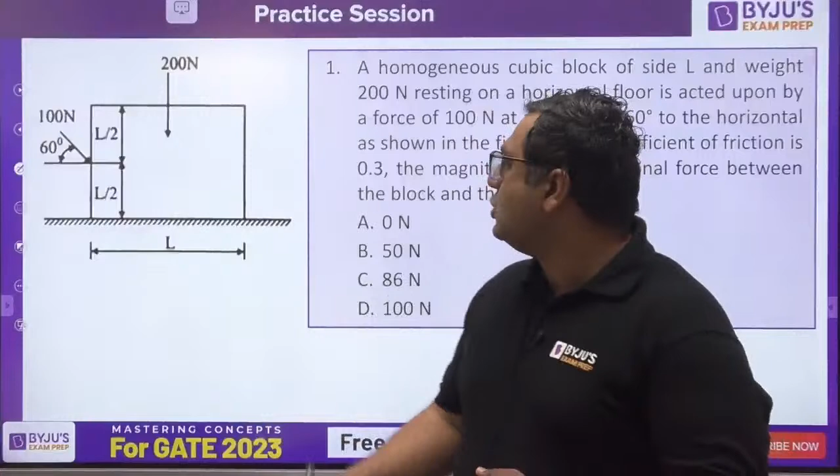So guys, we are starting the session, and this is the very first question from engineering mechanics. This question is definitely suitable for BARC and HAL both.

A homogeneous cubic block of side L, and weight is 200 Newton, so weight is acting as 200 Newton. Now he is asking that a force of 100 Newton is applied at an angle of 60 degree, so 100 Newton is acting here. It would be having two components. One component would be like this, 100 cos 60. And obviously you would be having another component downward only, that is 100 sin 60.

Now you need to see that if the coefficient of friction is 0.3. As you are applying the force in this direction, the tendency is to move in this direction. So here the friction would be coming, that is mu times n, and the normal reaction would be n. Now he is saying find the magnitude of friction force between the block and the floor. So you just need to find out the friction force magnitude. For that you need to calculate the n, and for that you need to apply summation of vertical forces equals 0.

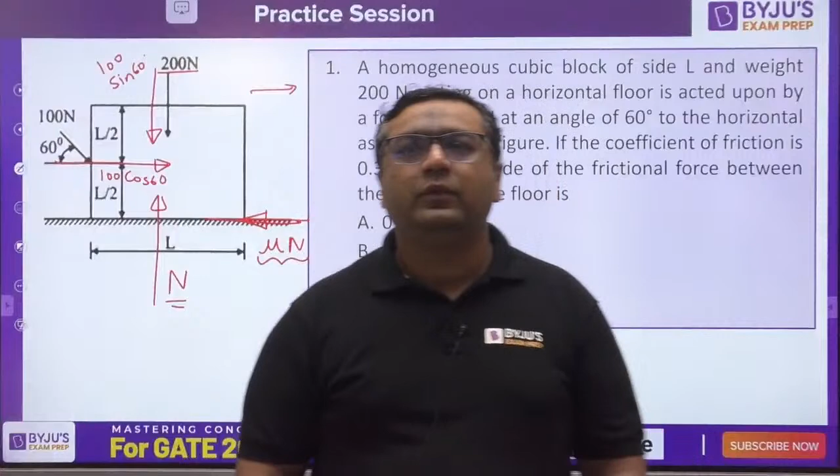Great, Abhishek. This is a very easy question from mechanics, from friction basically. This is a favorite topic for all examinations in engineering mechanics. If it is in syllabus, a question would surely be coming from friction. Abhishek is saying 50 Newton, very good. Let us see what about others. So Abhishek has given the answer as 50 Newton.

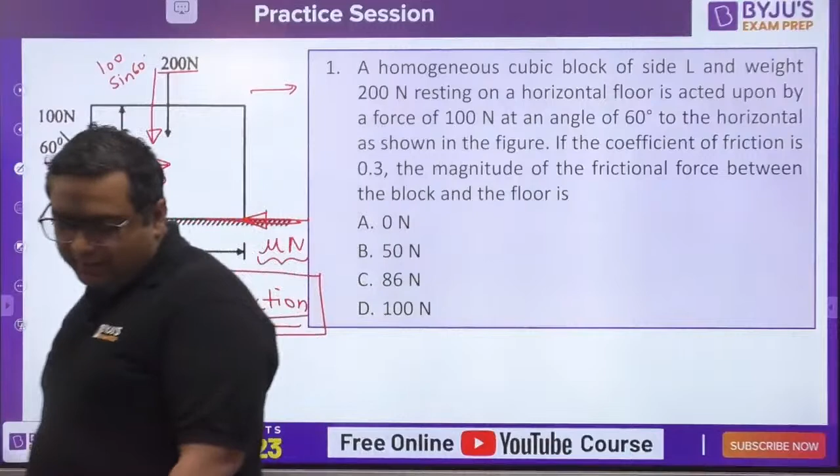What about others? Anybody? I would be giving you a hint for that. You need to do summation vertical equals 0 to find out the value of n. You can see 200 Newton acting downward, 100 sin 60 also acting downward, so minus 200 minus 100 sin 60, and then n is acting upward, so plus n equals 0. This will give you the value of n. Very good, Gaurav Vajpayee saying answer to be C.

Let us see who is correct out of you guys. So you would be getting n from this, and once you get n value, you can also apply summation horizontal equals to 0.

So if you are going to find this, first let us see what is mu n. When you write mu n, this is the maximum value of the static friction. So when you find it out, it would come out to be the same as what Gaurav Vajpayee is saying, that would be 86 Newton.

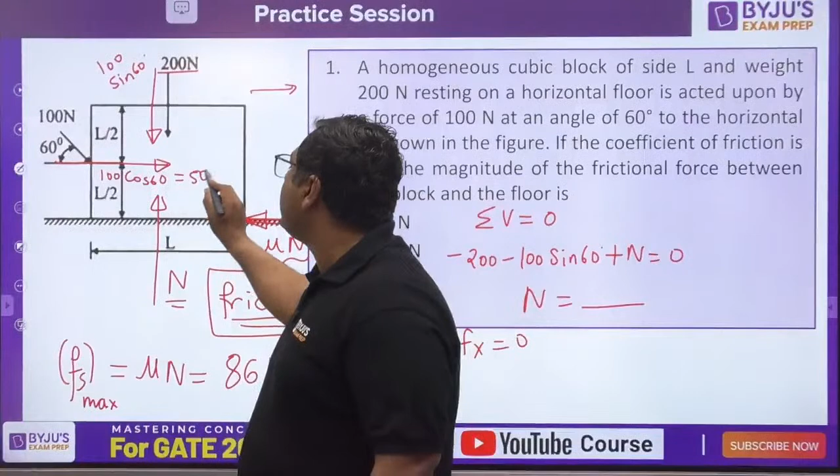But there is a twist. That twist is that this is the maximum value of friction which can come. But if you see the horizontal force is 100 cos 60, this is 50 Newton. So if we have an applied force of 50 Newton, friction cannot be more than that, because friction works to stop the relative motion. So if it were more than 50, it would cause the relative motion.

So this is the maximum value which can come. The answer would be 50 Newton, because when you apply summation fx equals 0, since the body is at rest, this cannot be more than 50 Newton. So the answer is 50 Newton, answer B. Abhishek, you have given the right answer.

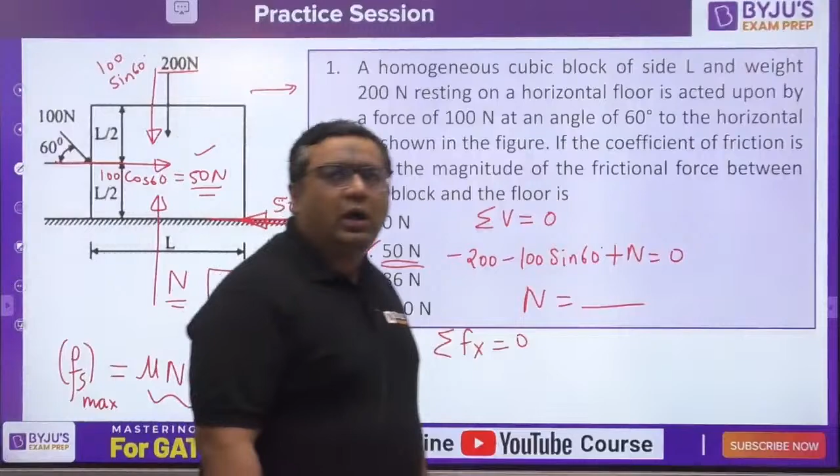So I feel Gaurav, you got your mistake for sure, yes or no? I also wanted to know, like last session also you attended, I asked you about the exam also. Okay, I will connect with you after the class.

Let us see the second question. This is from the trusses. After friction, the second important topic is truss. Here you need to find the force in member AC. I would recommend you go by method of section. If you cut the section from here, going by method of section will give you the answer fast. Method of joint will take a lot of time.

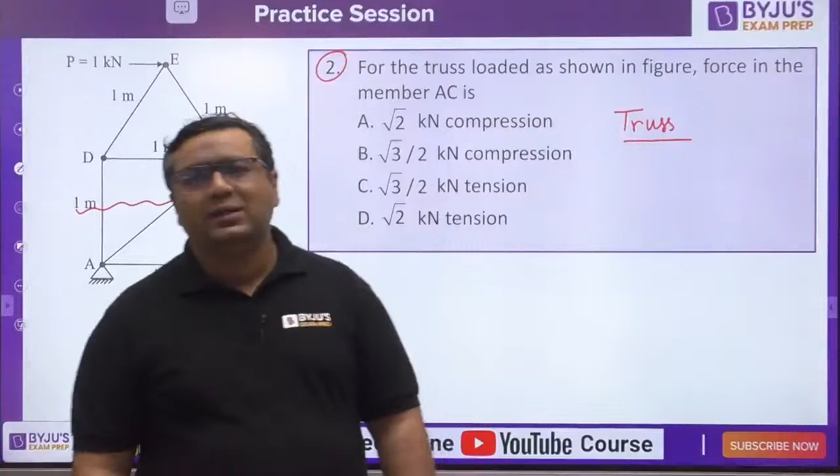Try to solve this question guys, and quickly like and share the session so other students can join. Some people, like Abhishek Prasad, your answer is correct for the previous question. Some students feel it is a less important subject for the exam. Guys, it is not like that. PSUs, when they increase or decrease the weightage of some subject, nobody knows. The same is for BARC, ISRO also.

So there is no standard format that one subject comes more or less. Abhishek is saying the answer is A, meaning root 2 kilonewton compression. Let us see, so he deleted it, meaning he is still thinking tension or compression, or root 2 or root 3 by 2. Yes, Gaurav is saying A.

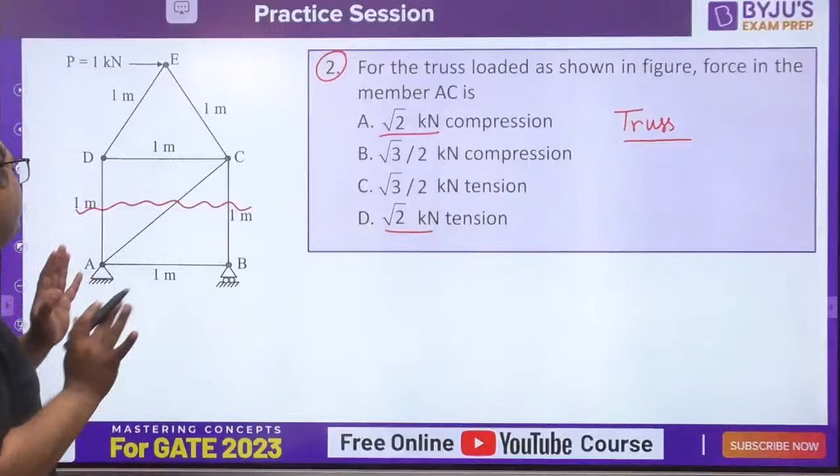What about others? Abhishek Prasad is saying D now. Okay, very good. So both of you have answered root 2 kilonewton only, magnitude wise, but direction wise there is some issue I feel. Let us see. First you must be clear that now we have made this section, so we would be having force in AD member, AC member and BC member.

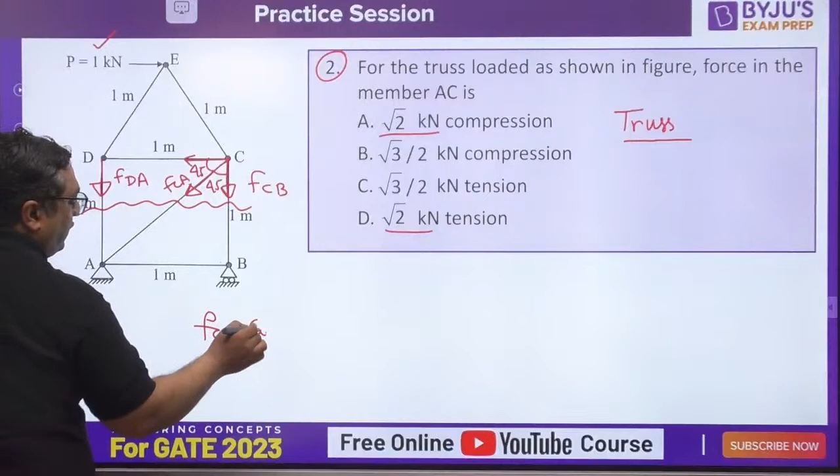So this 1 kilonewton is acting, so we have this force in vertical direction, this force also in vertical direction. So this is FCB, this is FDA. To balance this force, we want force in this direction, so this force would be acting in this direction. So FCA would be in this direction, so that this component of FCA, as the sides are 1 meter, this angle is 45, and so is this. So FCA cos 45 would be balancing this 1 kilonewton.

Okay guys, so Omkar is saying D. So you would find FCA. FCA is 1 divided by cos 45. The answer is no doubt root 2 kilonewton, and direction also we have taken correct only.

So when you are confused in direction, just imagine a spring. Force is coming away from the joint. So when the force is coming away from the joint, when you are in tension, then only you would be applying like this. So the answer would be D. Gaurav, what are you doing, silly mistakes. So answer would be D, in tension.

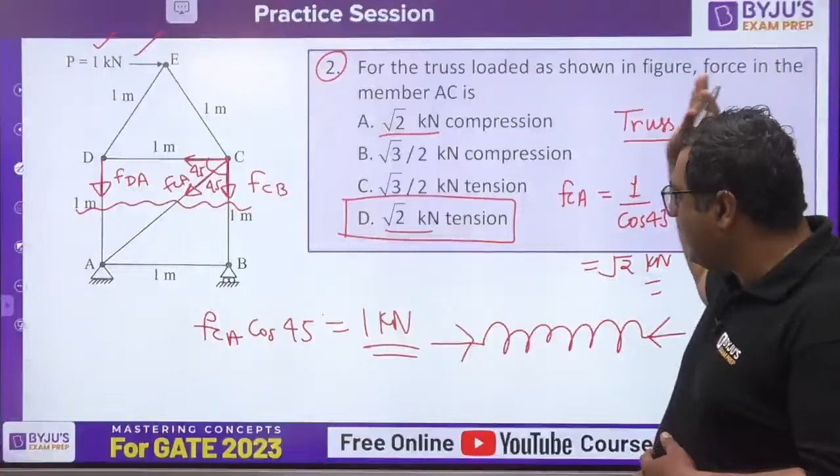I feel I have covered that kind of things on YouTube also in great detail last year. Okay, let us see the next question.

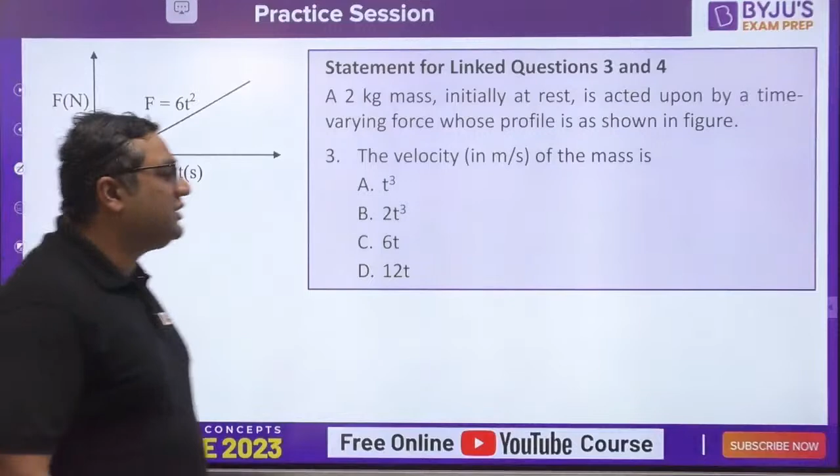This question is from kinematics, the third important topic. It is having two parts. Mass is given as 2 kg.

We know that a variable force is acting, given as 6t square. Force is mass into acceleration, so from that you can find out the acceleration. If mass is 2 kg, acceleration is 3t square.

But you need to answer about the velocity. You know acceleration is nothing but dv by dt. I feel now you can very easily do this. This type of question comes in GATE, BARC, and all the examinations. Solve it.

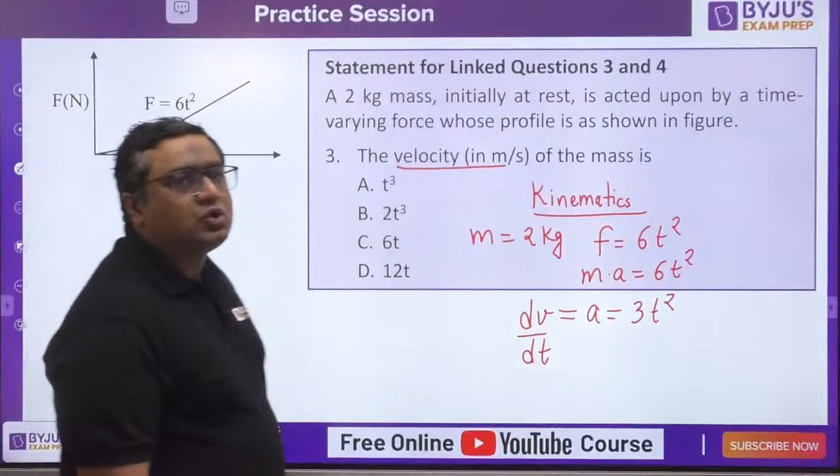Omkar is saying answer to be A. What about others? So when we are getting dv by dt equals 3t square, dv is 3t square dt.

So you would be getting v minus u as t cube. You can see at t equals 0, the force is 0, acceleration is also 0, and initially at rest is mentioned. So it is sure that u is going to be 0. So v is t cube. A is correct.

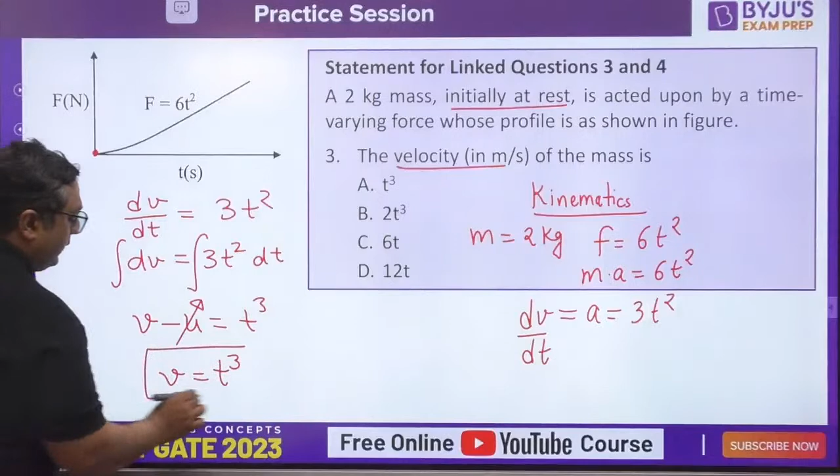Omkar, don't worry, I have taken all the levels. I feel you have attended last class, where we had a very good level question in machine design, 3 to 4 questions, and none of you were able to do that. So dear, I have mixed it up because this session is for both BARC and HAL, so I need to cover both the levels. That is the reason. So this is the second part. If you see the HAL pattern, you will get this type of question. So mind it, I need to take care of both the papers. That's why some questions are very easy, some are difficult, some are average.

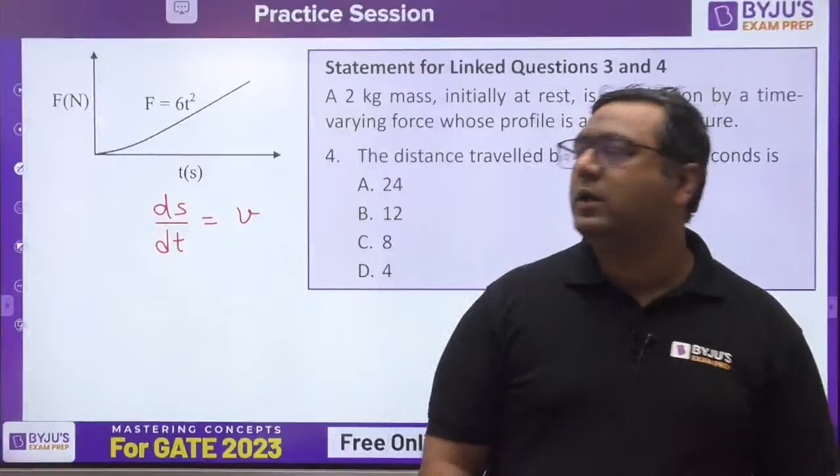So this is basically to find out the distance traveled. You know ds by dt is velocity. From here, don't worry, other questions you will feel something of better level for sure. Here you need to find out displacement after 2 seconds, so s at t equals 2 seconds.

Yes, like in production also we had very good level of question you have seen. Very good guys. So this is basically of HAL type, okay, this is of HAL type.

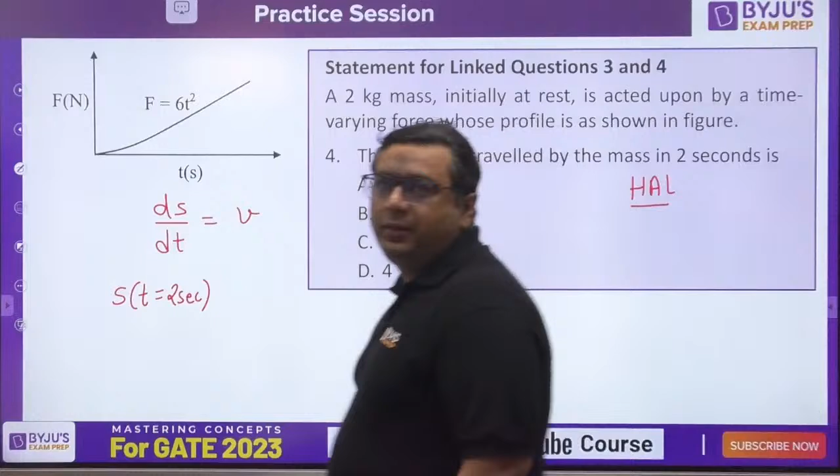Yes guys. Omkar is saying D. So my dear, ds by dt, velocity is t cube. So we got s as t to the power 4 by 4. So when you would be integrating it, after integration only we are getting it.

So we got it. Put t equals 2. You will get 4 would be the answer.

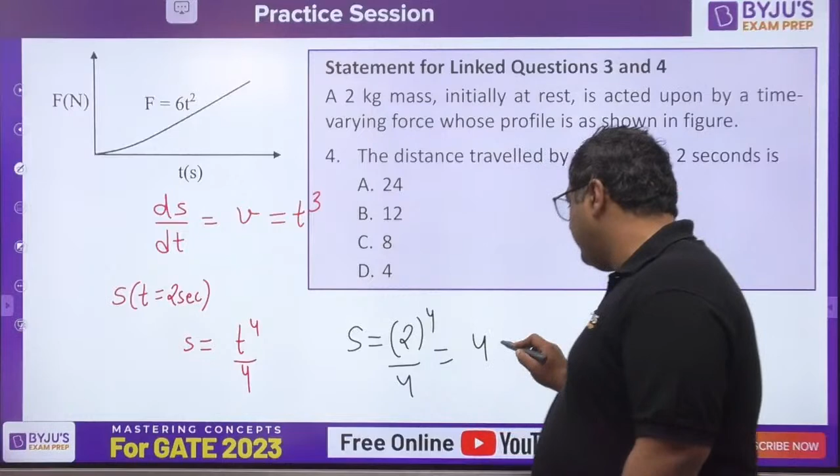Let us solve the next question, guys. This is certainly a good question this year, GATE 2022. Very good, Gaurav, in GATE 2022 similar type of question was asked. So this is a good one. I will say that this is not a difficult one, but it is a good type, because sometimes by looking at such figures, people just leave the question.

So it is okay for both the exams, BARC and HAL. As this is an exam specific series, we need to take care of level of both the exams. Otherwise, don't worry, if you remember I came for some series like Super 20, Super 30, those series are having some wonderful level of questions. So this year also we would be coming with such series. And for Vision 2023, for 2023 students, I would be soon coming for Mastering Concept. There also I would be going for Engineering Mechanics and Strength of Materials. We will start it in the end of this month.

So what would be the answer for this, guys? Yes, I would be giving you a hint. If you will see the FBD of this rod, the things would become easier for you.

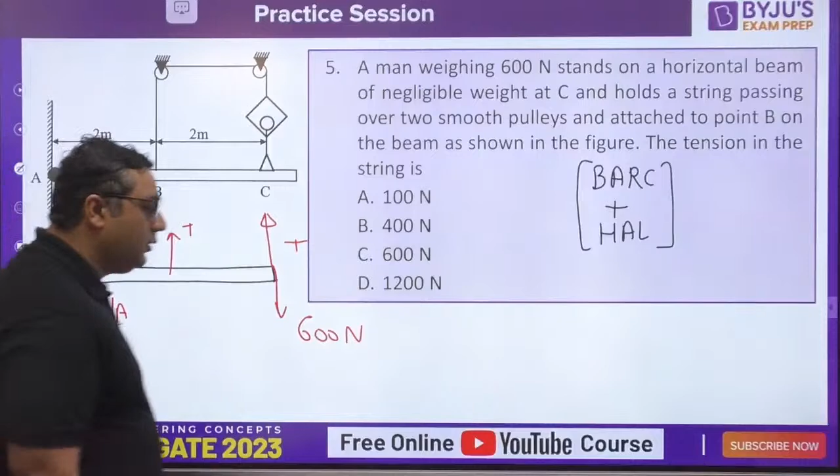FBD is in front of you. Abhishek is saying the answer to be B. What about others? If you guys are doing this after looking at the hint, it means it was a good question for you.

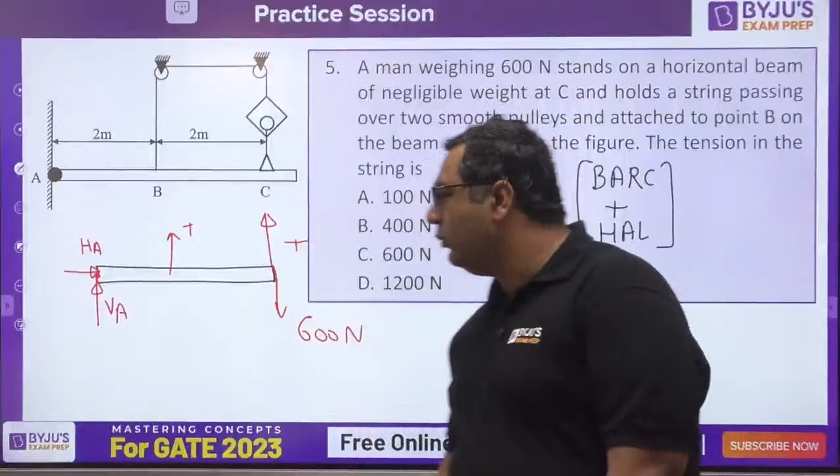This is tension T. So you just need to take summation of moment at A equals 0, because both these forces would be passing from the same point. So this T anti-clockwise acting at 2, minus T into 2. This T is acting at 4, minus T into 4. This 600 is acting at 4.

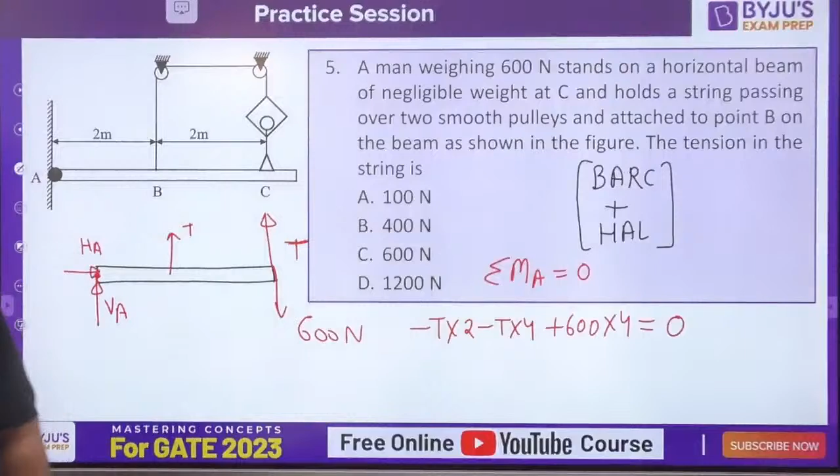Gaurav is getting B, Abhishek is getting B. What about you, Omkar? Omkar, Abhishek Sahu. Yes, the answer would be coming out to be... this is 4 plus 2, 6T, 2400. So T would be 400 Newton. B is correct.

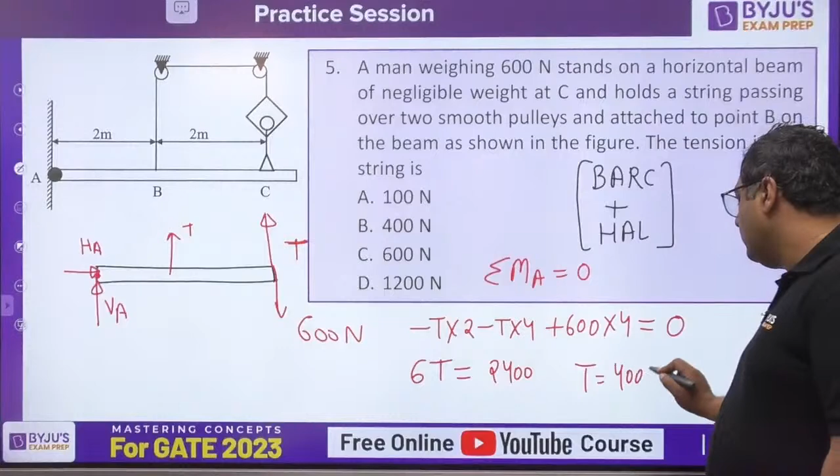Very good guys, let us move to the next question. This is the last question from mechanics. Then we are coming with other questions from MD only - brakes, bearings, fatigue loading. Many questions are there.

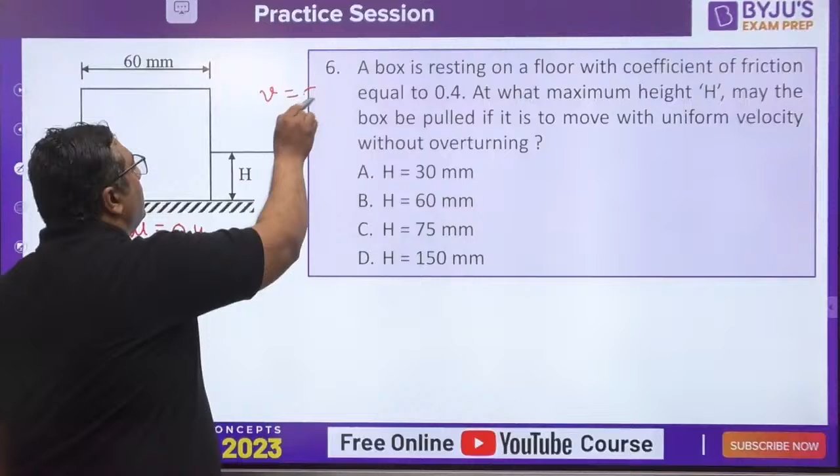Let us see. A box is resting on a floor with coefficient of friction equal to 0.4. So for this, mu is given as 0.4. What maximum height h may the box be pulled if it is to move with uniform velocity without overturning? The last point without overturning is when the normal reaction is passing through this point, because after that the turning happens. So we would assume for the limiting value, N would be acting here, mu N would be acting here, and weight would be acting here.

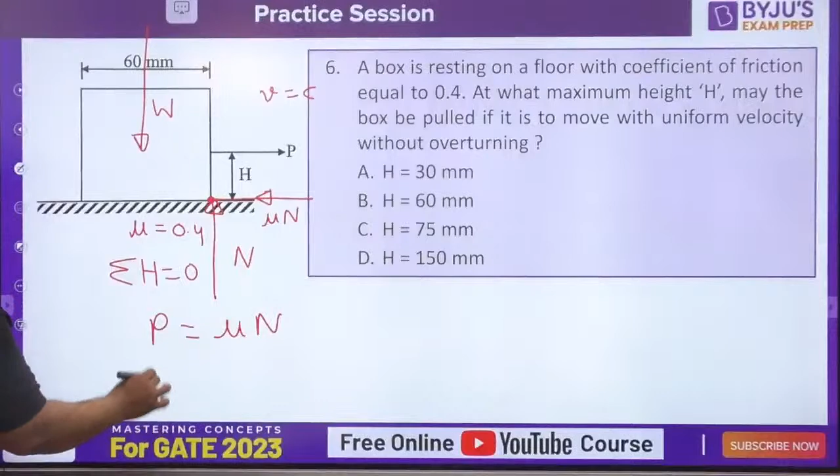You need to find out now what is the value of h. If you apply summation horizontal equals 0, you would come to know that P and mu N are equal, and W and N are equal. Solve it. You need to apply P into H, the moment created by this would be equal to the moment created by W into 30. This will give you the value of H.

Coefficient of friction mu is given to us. W into 30, P is mu N, and N is W. So I feel it is already almost done.

Shivani, good evening, how is your preparation going on? I was expecting that you are performing well in GATE. What was that, how many marks are you getting in GATE? Abhishek, if you don't want to tell in the comment section, you can also tell me on WhatsApp or Telegram.

Abhishek is getting a C.

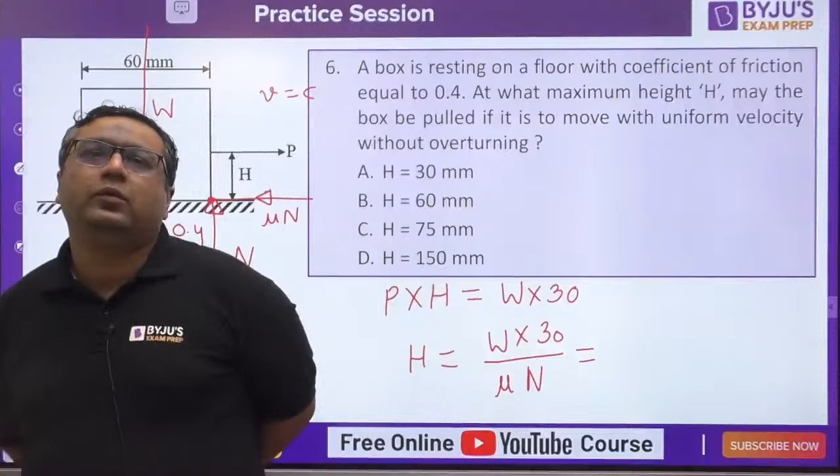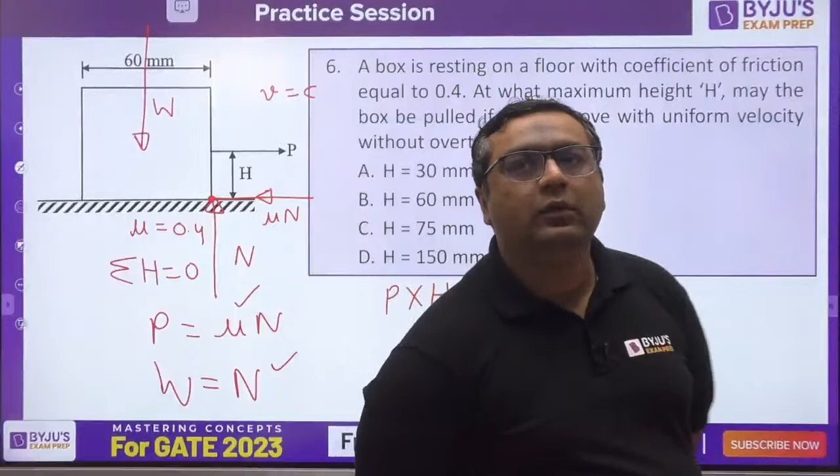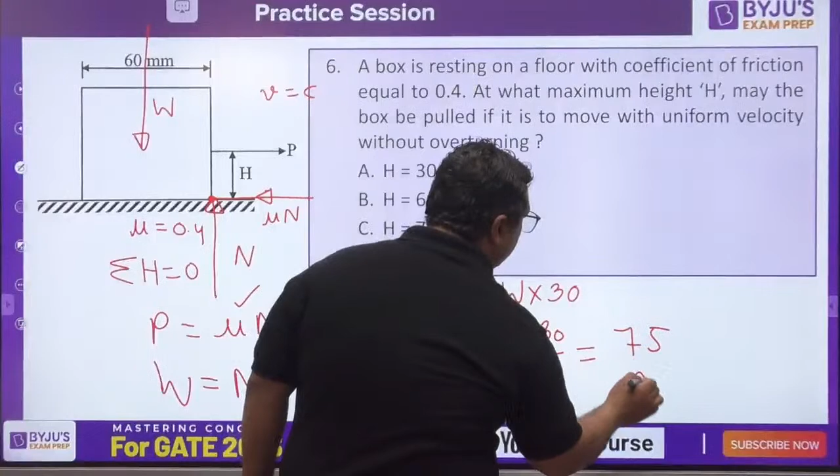So Abhishek has answered it as C. What about others? Shivani is also saying C. What about others? Gaurav has already answered it as C only. So yes, the answer is C. C is correct. Let us see the next question.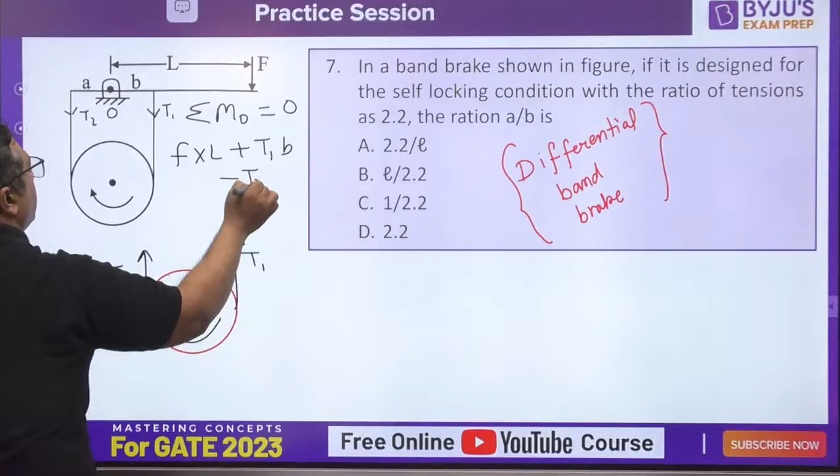So if you see this drum, it is rotating like this. Here there would be a tension T1, here there would be a tension T2. If you are talking about this point O, summation about O would be 0, so F into L clockwise. Here also tension would be T1, T2. T1 is clockwise. And braking torque is T1 minus T2 into R.

So you would be getting from here, F should be T2A minus... F and T1 are in same direction. F is T2A minus T1A, T1B. So F should be less than or equal to 0 because the condition is mentioned as self-locking. So you can answer the condition - what would be the answer? This is differential band brake, guys.

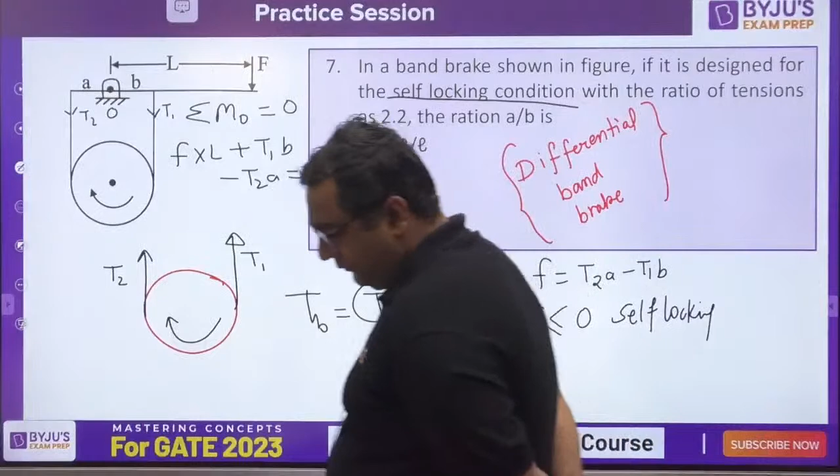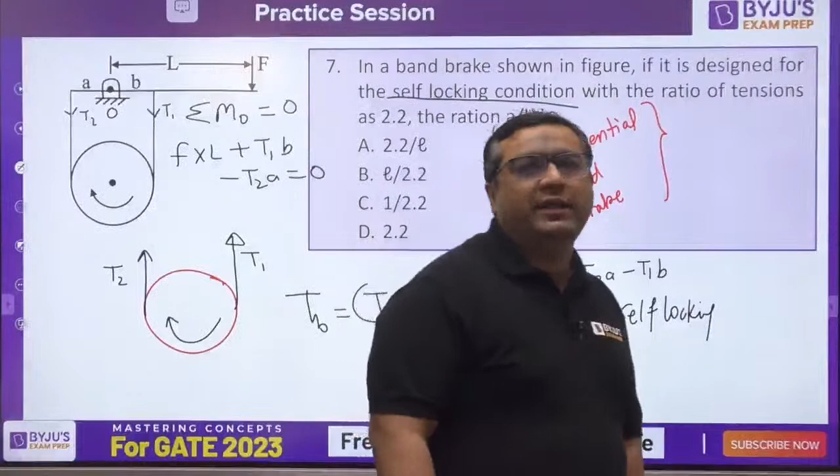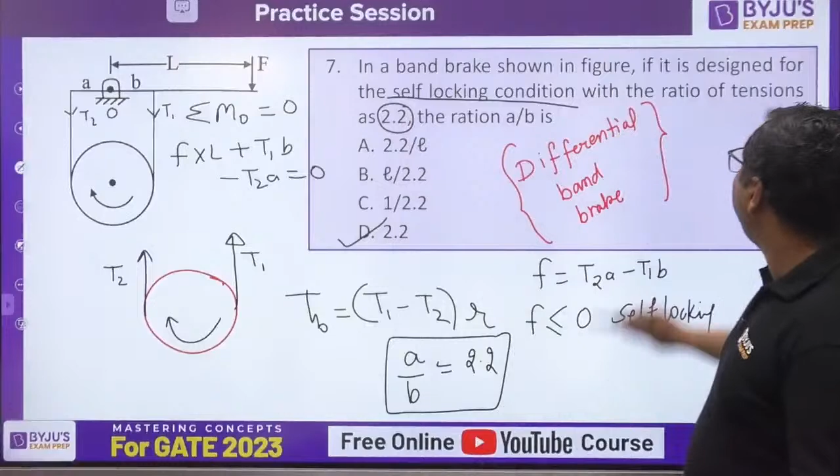Gaurav, Abhishek, Shivani - very good, Shivani is saying D. Gaurav is also saying D. Yes, so dear you would be getting A by B, 2.2. Why? Because it is mentioned the ratio - the ratio of T1 to T2 is 2.2. Same you would be getting here.

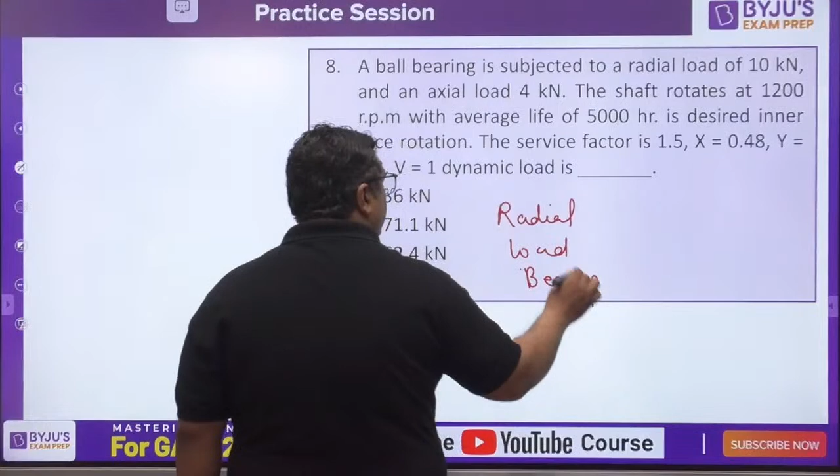Let us move to question number 8 now. This is from radial load bearing. First of all, you need to find out the equivalent load, X V FR plus Y FA into S, then C by PE, L90. Values are given to you. Question number 8 it is.

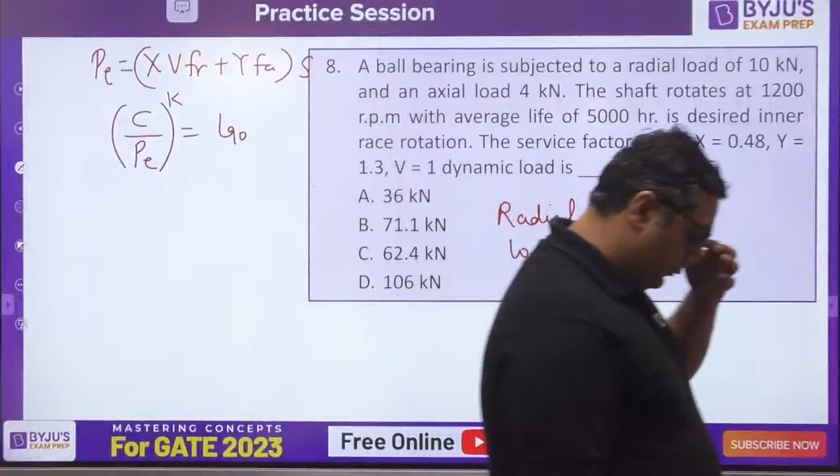Yes, yes. Yes, guys.

So here you need to find out the dynamic load. Actually, radial and axial loads are given, you need to find out dynamic load carrying capacity. C is unknown here. So Abhishek is getting D. Gaurav is saying B, Shivani is also saying B. So dear, the answer would be D here, 106 kilonewton.

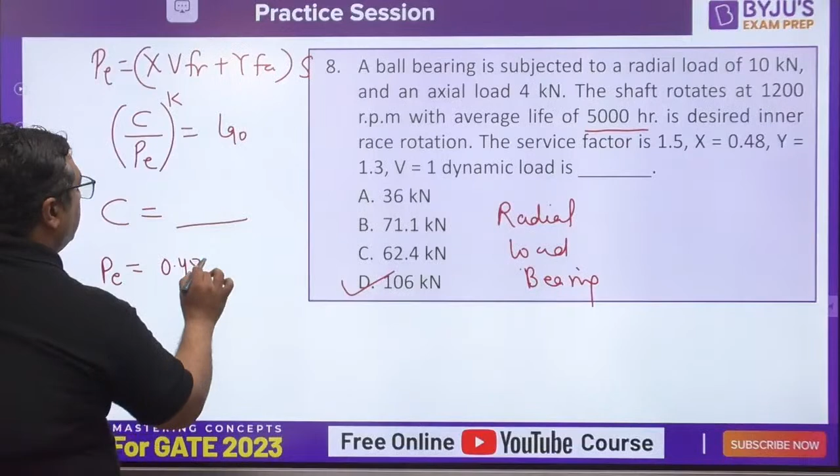When you would be finding out the PE value, you need to apply that. You must have seen that the life was given in hours - it needs to be converted into million revolutions. So you would be applying PE first of all. X value is 0.48, V value is given as 1, into FR, FR is 10 kilonewton. Okay, then plus Y is 1.3 into axial load of 4 kilonewton into service factor of 1.5.

You must have missed something - this will give you PE. And L90 you need to find out in million revolutions: 5000 is the hours, into 60 will convert into minutes, into speed as 1200, divided by 10 to the power 6. This will give you the L90 value. So the answer would be D. Did you get the mistake, Gaurav, Shivani, where you have made it? Maybe you have not taken the service factor, or this conversion you may not have done. Is it clear? So answer would be D for this.

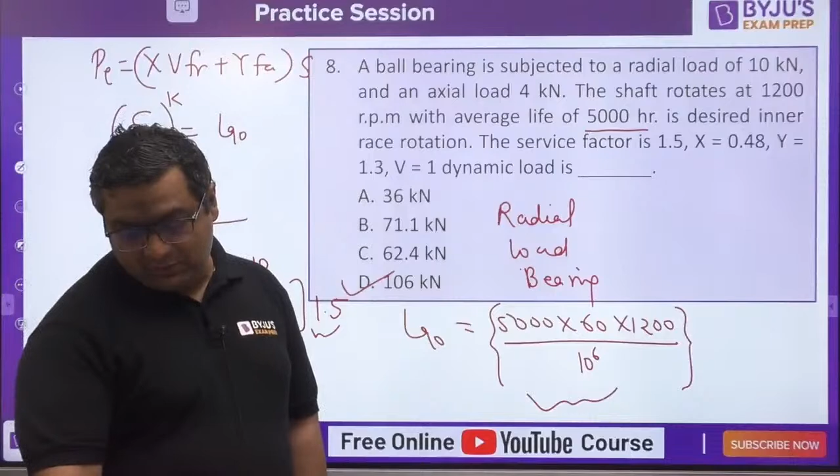So this was question number 8. Let us move to the next question. Next question is from the riveted joint now once again. Previously we have seen a question without calculation. Now we will see a question with calculation - riveted joints.

This is the problem on riveted joints. Yes, I understand that.

So guys, this is the data given. You need to find out the resultant maximum shear load. You already know the procedure. You need to first of all find out the CG or centroid, which is this.

Eccentricity is given to you. Now you need to see the effect. You can see, there would be one load coming and one couple coming. So when you would be having this condition, the primary forces would be coming like this. Secondary forces would be coming like this.

So FP1, FS1, FP2, FS2, FP3, FS3, FP4, FS4. You need to find out the resultant maximum shear load. So just solve it and get the values.

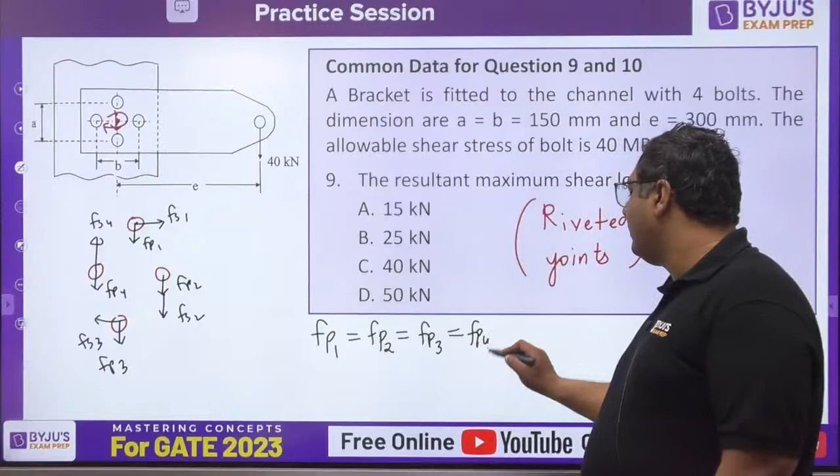So first of all, primary is very easy to calculate. FP1 equals 10 kilonewton.

Then you would be finding out the secondary. FS1 R1 plus FS2 R2 plus... P into E. This will give you FS1, FS2, FS3 and FS4.

This also I feel you would be getting 40 kilonewton. So you would be finding out resultant as FP square plus FS square plus 2 FP FS cos theta.

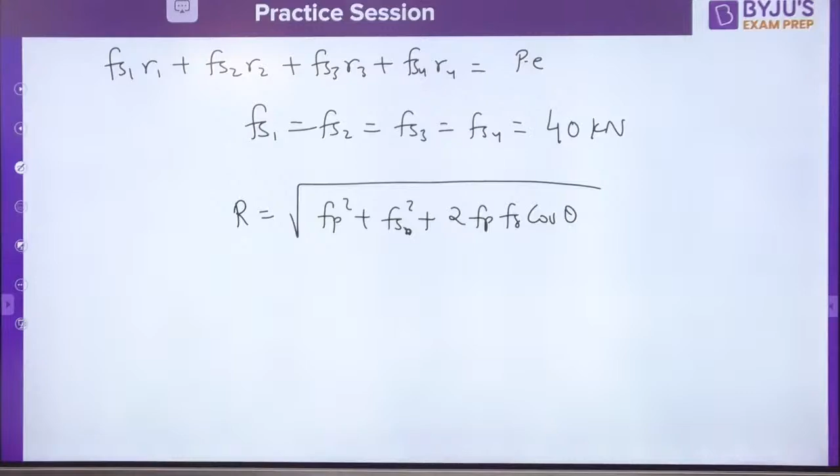Very good. So the answer everybody is getting is D, and which is correct answer. D is correct.

So here you need to find out the nominal diameter of the bolt. Once you get the resultant force, use pi by 4 dr square equals tau max.

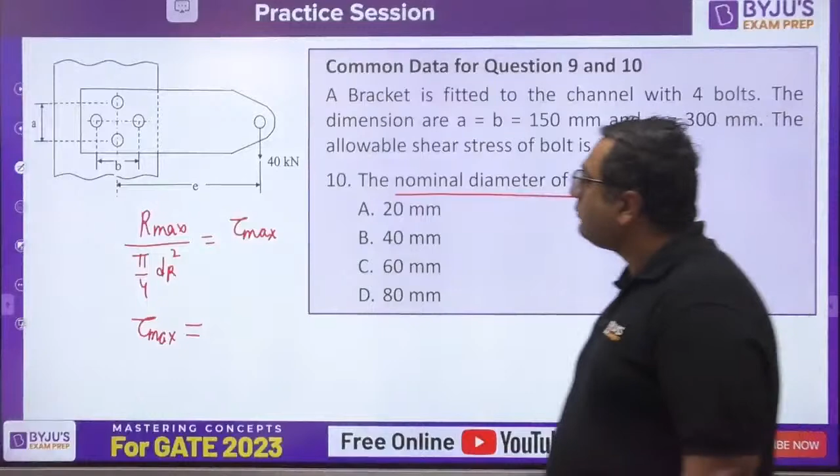Yes guys, question number 10 it is. Okay, Gaurav is getting B for that.

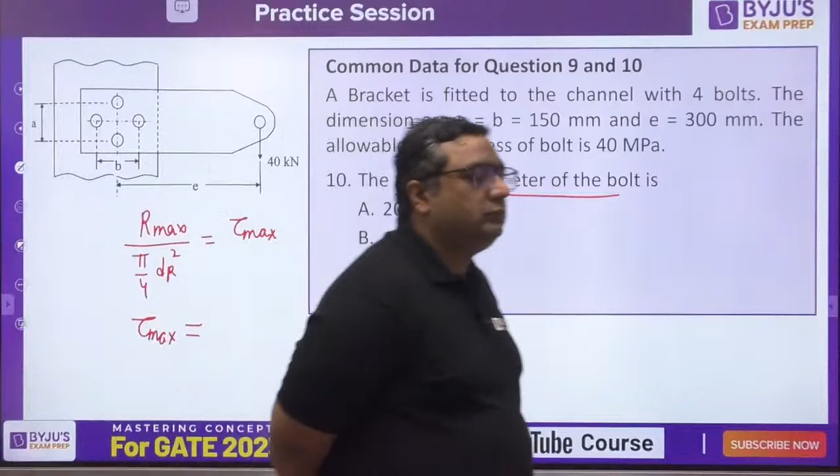Shivani is saying B. Gaurav is also saying B, and B is correct. So you would be getting dr as 40 mm. Because tau permissible was given, so you would be saying it's less than or equals to tau permissible.

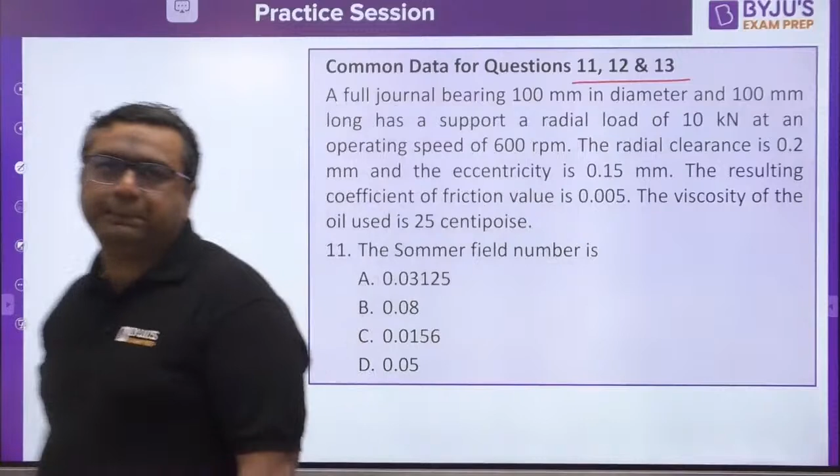Very good. So guys, now we reach the bearing part. Now three questions continuously on the bearings. First of all, you need to find out the Sommerfeld number. So Sommerfeld number is Zn by P, D by C. So for that you need to find out the P, which is W by LD.

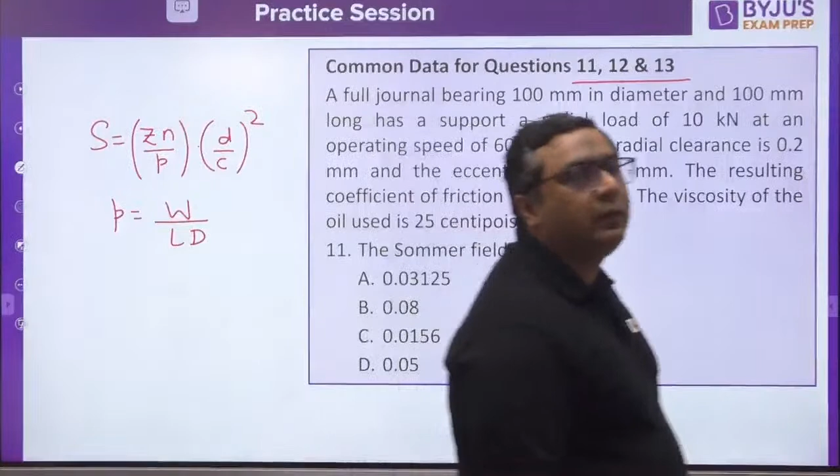Find out. Yes guys, find out the Sommerfeld number. Slightly calculations are involved for sure.

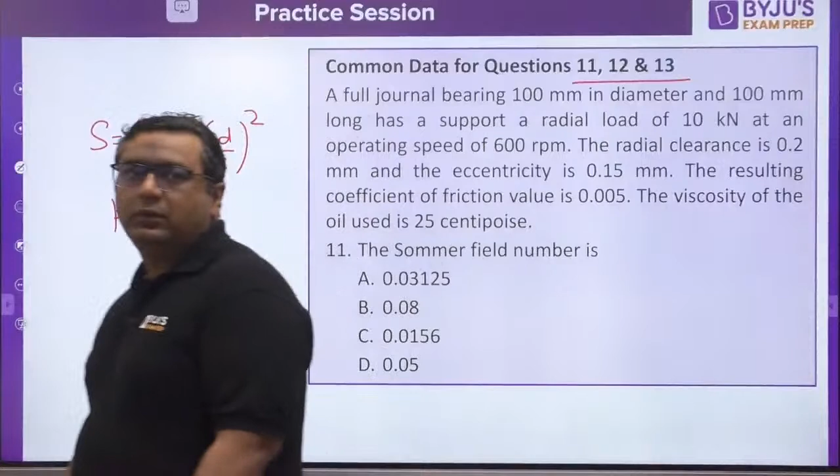Let us see how many of you give the right answer for this. Four options are there. Very good. Gaurav is saying C for that. This is a good question for BARC.

Yes. So guys, the answer is yes, C is correct. So Sommerfeld number would be coming out to be 0.0156. Very good, Shivani.

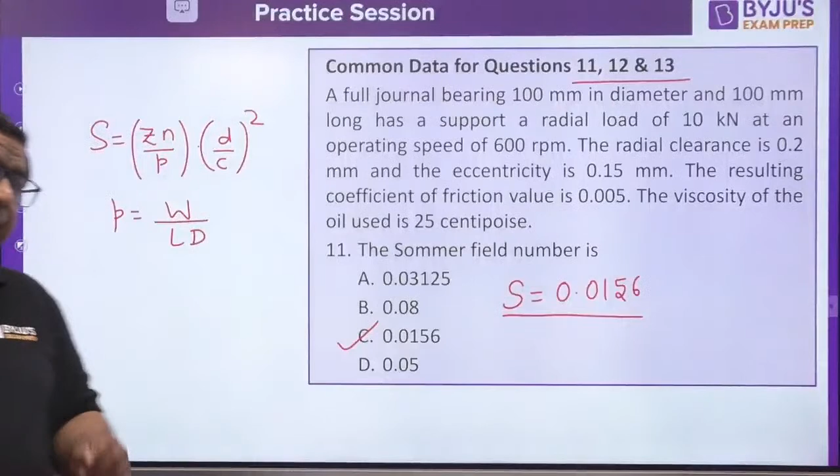So let us move to the next question. Here you need to find out the frictional power loss. You know that power loss is mu WV.

And mu is Zn by P, 2 pi square, D by C, by Petroff's equation. P you have calculated in the previous question.

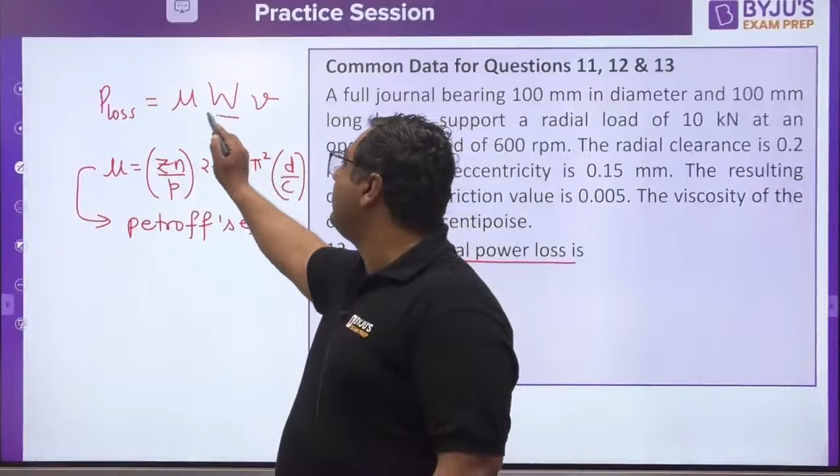So first you will find out mu, then you will apply here. W is given to you. Velocity you know is r omega actually.

I feel coefficient of friction is already given. Okay, sorry, coefficient of friction is already given, no need to find out this then. Mu is given, W is given, V is R omega. Okay, you can see the speed is given.

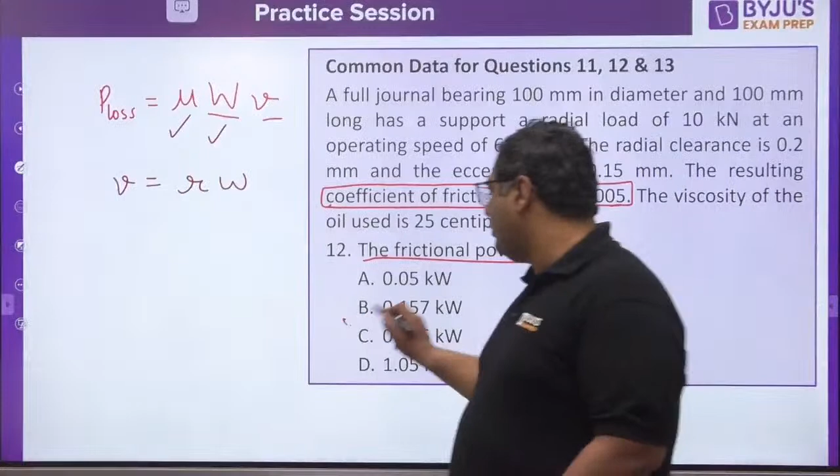Okay, Gaurav is saying B, Shivani is saying B. Yes, guys, your answer is correct. The answer would be coming out to be 0.157 kilowatts.

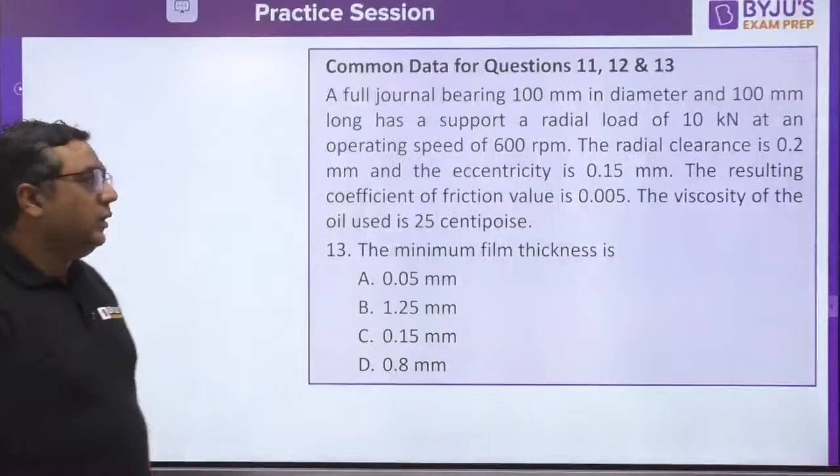How? If we have the case of hydrodynamic lubrication, this is the bearing, this is the journal. This is the center of journal, this is the center of bearing. So this distance is E, this distance is R, this is H naught.

Okay, so when you are going to apply, this total is capital R. So this capital R is H naught plus R plus E. So H naught plus E is equals to C1. Is it clear?

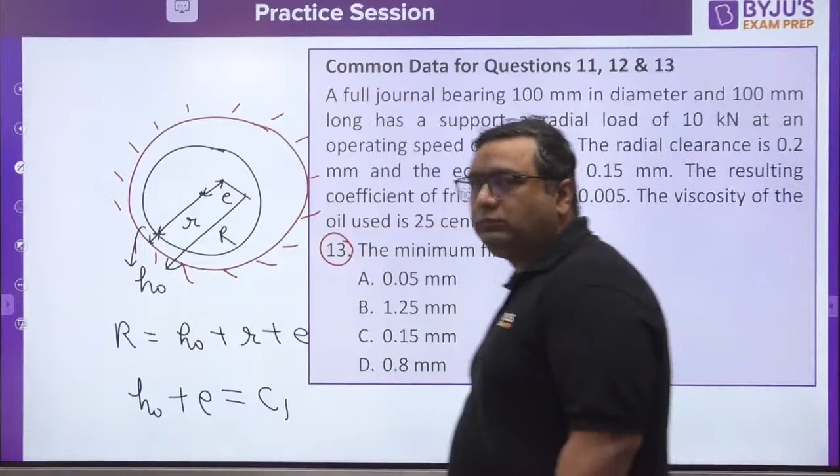So you need to find out and get the answer. Very good, Abhishek. So apply the formula and get the value. I have calculated for you. You need to find out the H naught value.

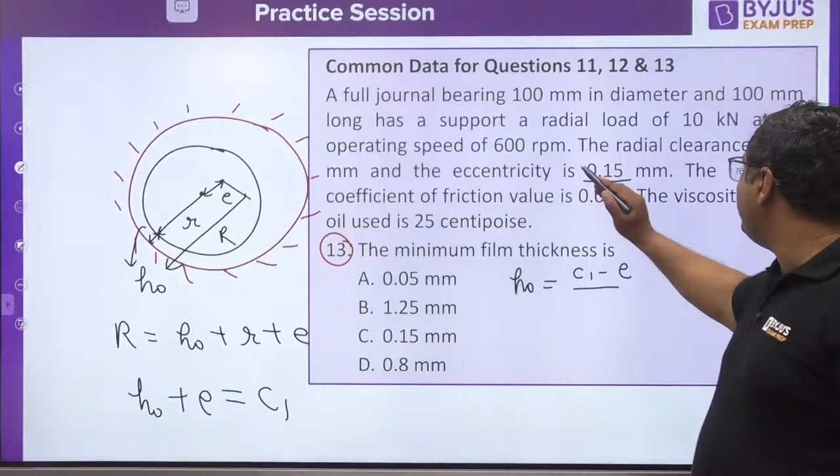Very good, Abhishek. So you can see H naught is C1 minus E. It is mentioned already. Eccentricity is mentioned, radial clearance is mentioned. A would be the right answer for this. Very good, Gaurav. Very good, Abhishek.

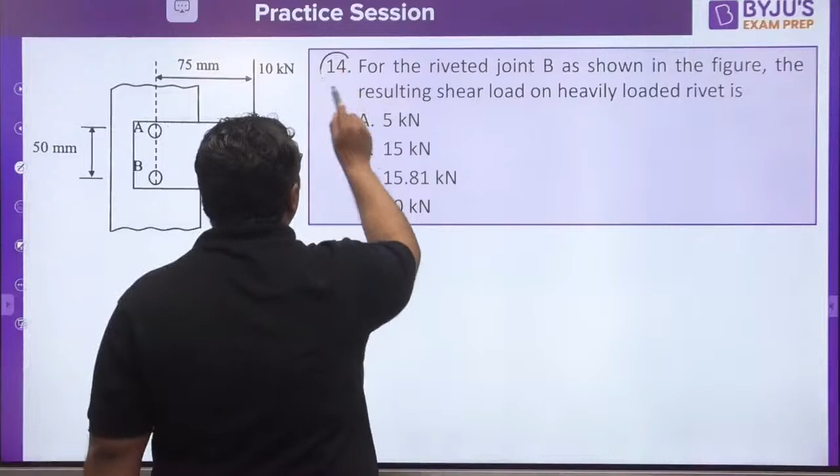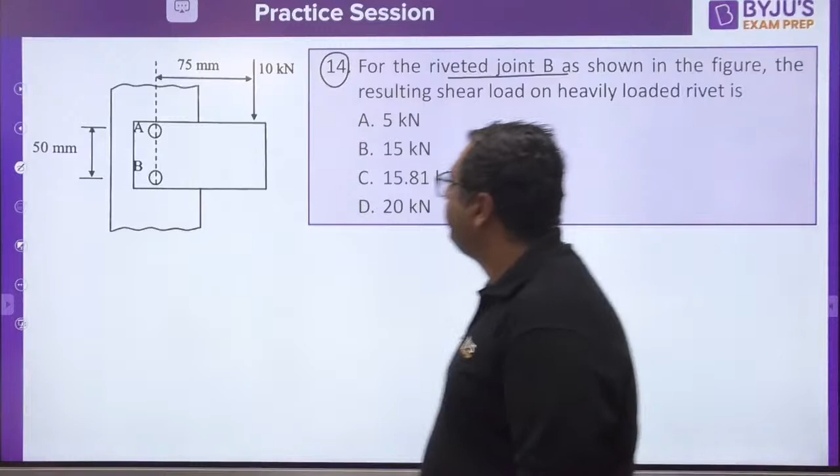Now question number 14, again from riveted joint, eccentric loading case. We have two more questions after this on Miner's rule and Soderberg. So you need to find out for riveted joint B the resultant shear load. You know, for this 10 kilonewton primary force in A, primary force in B is 5 kilonewton.

Yes, what about after this?

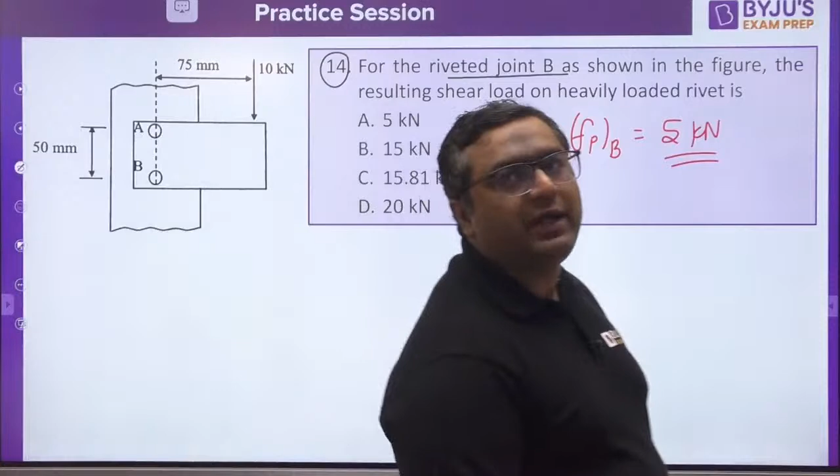Very good, Gaurav, Shivani, Abhishek. What about this question number 14?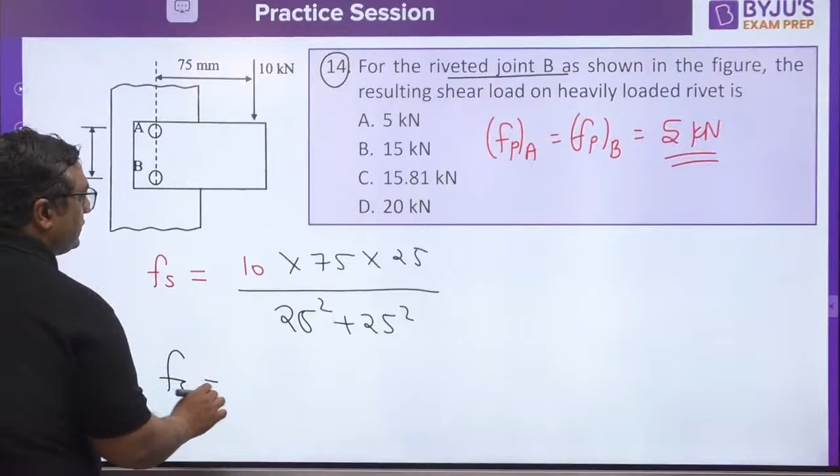Primary force is very easy to calculate, secondary also, because the distance is given, so secondary force is going to be 10 into 10 power 3. Why 10 power 3 when we want answer in kilonewton only? 10 into 75 PE into R1 upon R1 square plus R2 square. You would be getting the secondary force. I feel you would get around 15 kilonewton. Very good, guys. Very good.

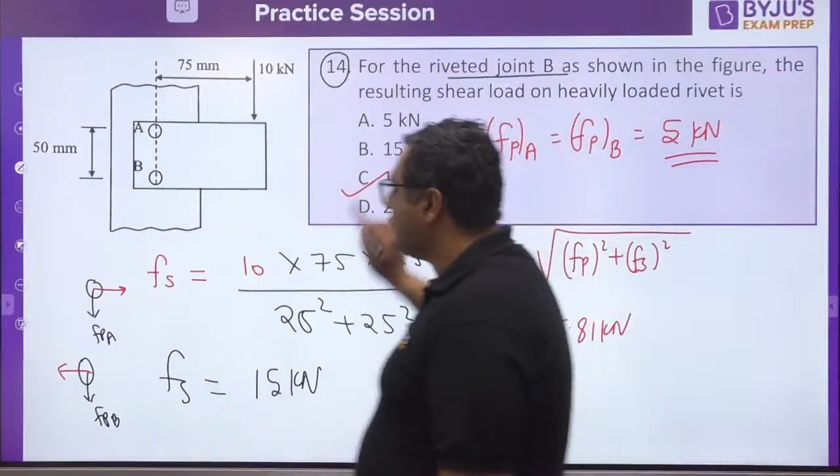This is 15 kilonewton. So resultant is, you know that when you are going to see A and B, primary would be like this in both. When you will see the secondary, it would be like this. So resultant is same for both. It would be 15.81 kilonewton. C would be the right answer. Very good.

Second last question, guys. After that, one more question we have.

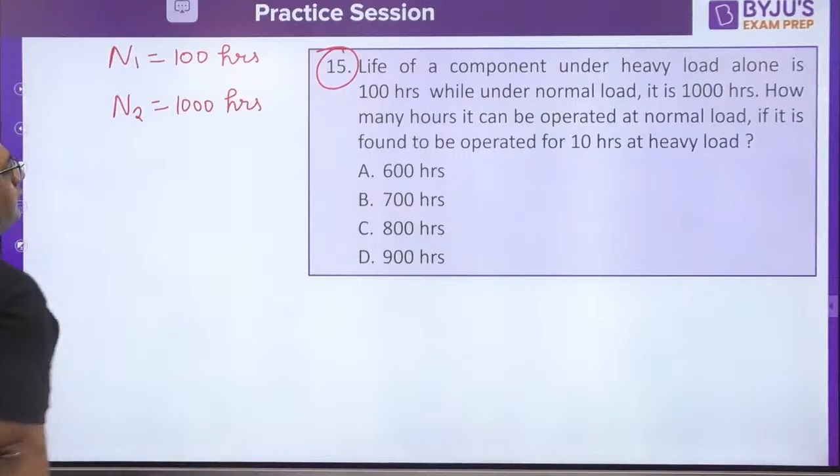Life of a component under heavy load alone is 100 hours. So life is given as 100 hours, so you know that it is capital N1. And it is 1000 hours. How many hours it can be operated at normal load if it is found to be operated for 10 hours at heavy load? So n1 by N1 plus n2 by N2 is equals to 1. So you need to find out n1.

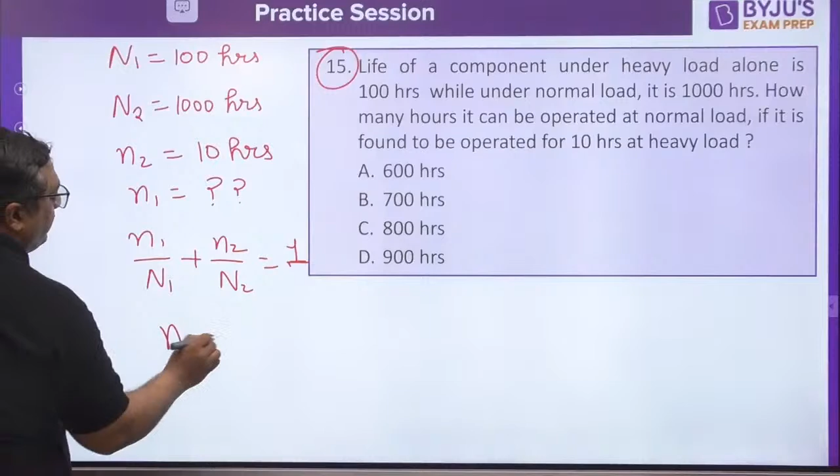Okay, Gaurav have said the answer to be D. What about others? Abhishek, Shivani.

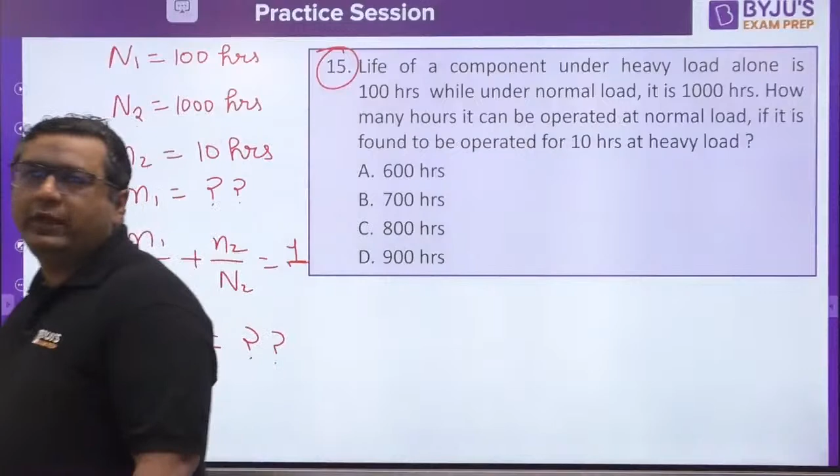Very good, Abhishek. The answer is D for sure, 900 hours. Whatever we have applied here is known as Miner's rule.

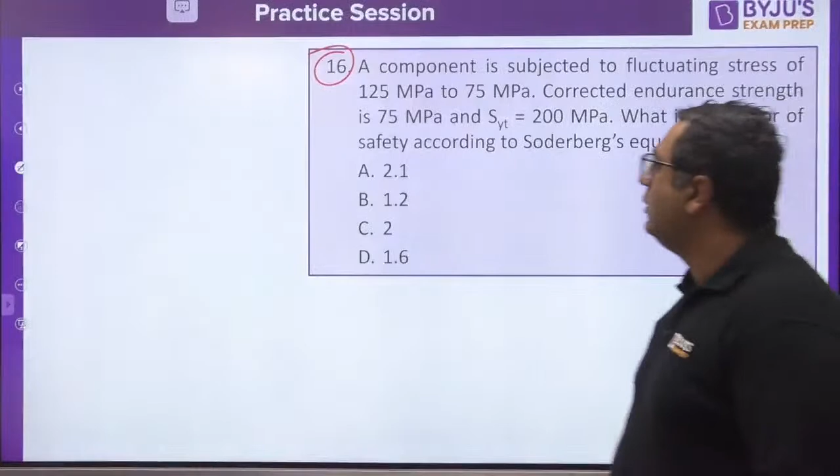Let us see the next question. This is from Soderberg. Okay, we have one more question. This is second last.

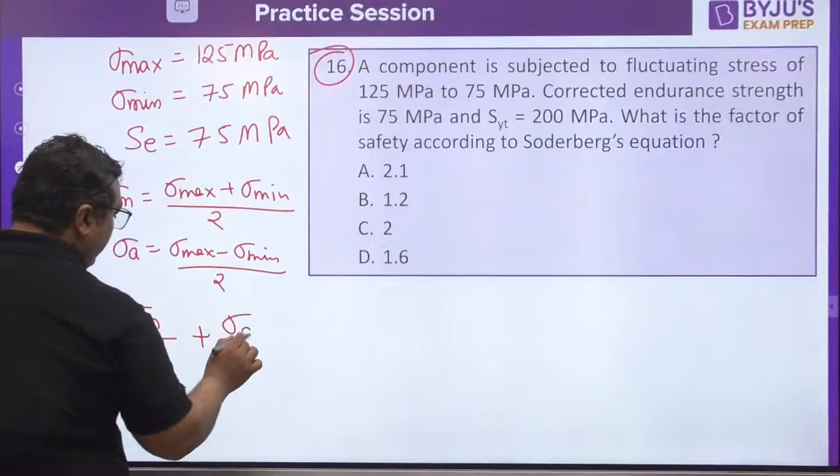A component is subjected to fluctuating stress of 125 MPa in sigma max and sigma min. Corrected endurance strength is 75 MPa. What is the factor of safety according to Soderberg equation? You need to find out first of all sigma mean, max plus min by 2. Find out amplitude, max minus min by 2. So sigma mean upon SUT, sorry, not UT but SYT. Sigma A upon SE, 1 upon N.

Okay, Sushil is saying B, Shivani is saying B, Abhishek is saying B, Gaurav is saying B. Yes, guys, the answer would be coming out to be B.

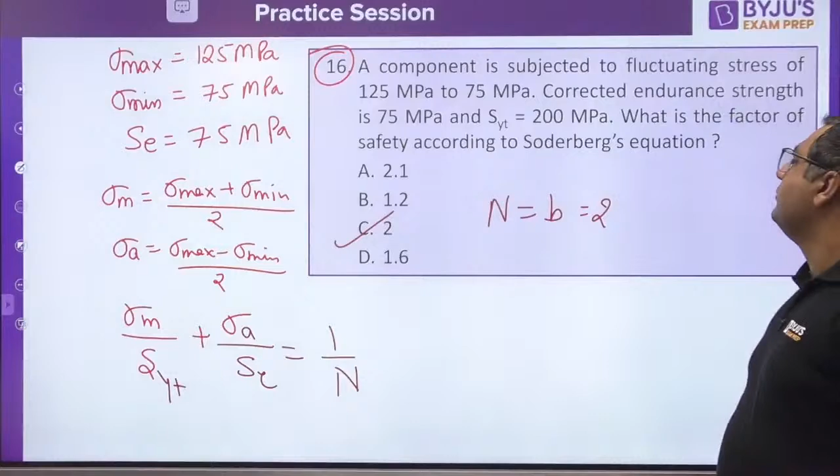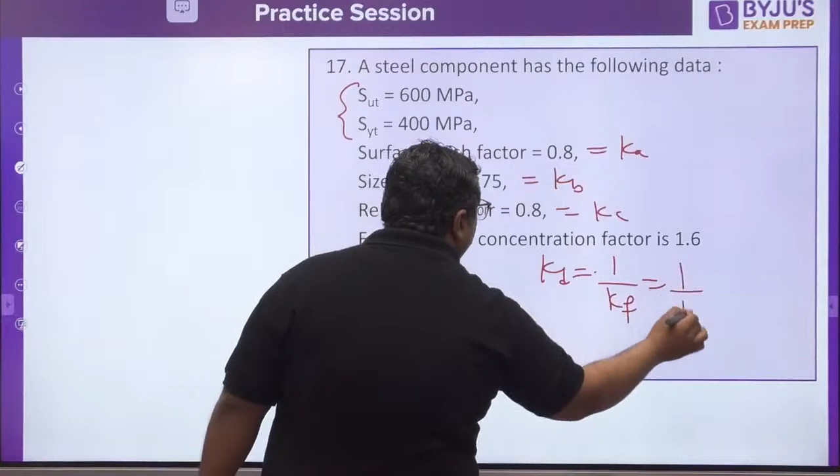Okay, the last question, guys. A steel component has the following data: SUT, SYT. Surface finish factor means Ka is given. Size factor means Kb is given. Reliability factor means Kc is given, and Kd is going to be 1 upon Kf, 1 upon 1.6. You need to find out

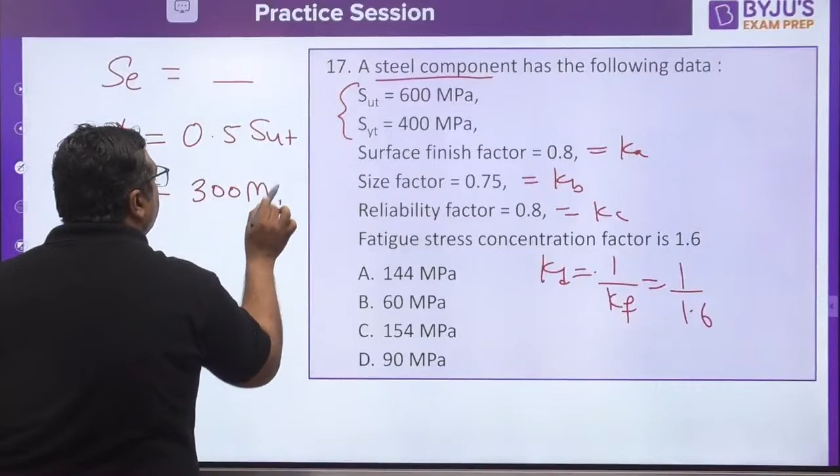You need to find out the endurance, corrected endurance limit. So dear, as they have mentioned, it's steel component, so you must be aware that the endurance limit is 0.5 times of SUT. So it is 300 MPa. Now to find out corrected endurance limit, multiply by all the factors Ka, Kb, Kc, Kd into Se star. You will get the endurance limit, corrected one.

Very good, Gaurav. Gaurav have already calculated and set the answer to be D. Shivani is also saying D. So guys, yes, the answer would be D for sure.

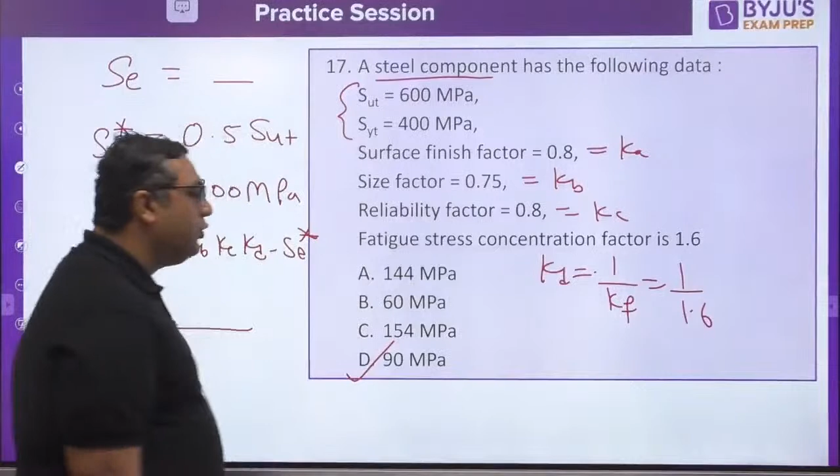And guys, don't worry, within 1-2 days after Holi, we would be coming with a session where we would tell you that the BARC exam is, I feel, preponed. So in April first week, we are going to give the exam. So for that purpose, what you need to do in the next 10 days, we will be having a session for that just after Holi. So just don't worry till now, till then, just practice more and more, revise the concept more and more.